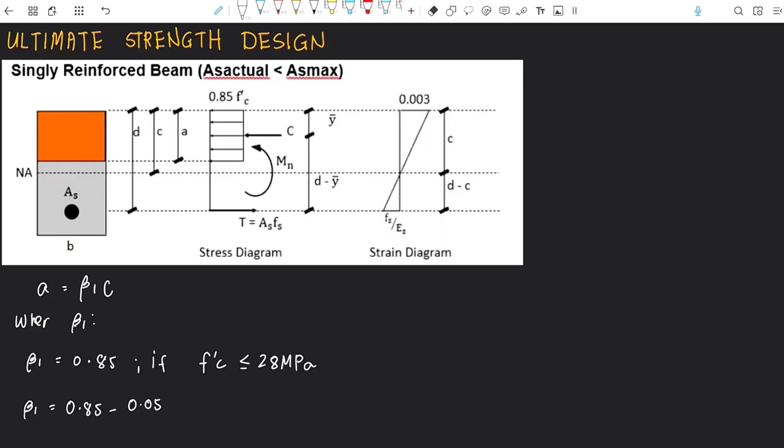Another, beta 1 is equal to 0.85 minus 0.05 over 7 times f prime C minus 28. Ito naman yung gagamitin mo if f prime C is greater than 28 megapascal. But may limitation din na huwag kang lalagpas sa 55 megapascal. Kasi once na nagsumobra ka na sa 55 megapascal, meron na ring pine-prescribe na value para kay beta 1. So beta 1 is equal to 0.65 if f prime C is greater than 55 megapascal.

So pwede mong sabihin na merong range ang value ng beta 1. Beta 1 is less than or equal 0.85 but greater than or equal to 0.65. So pwede nating sabihin upper limit si 0.85 then lower limit is 0.65.

Next, tignan natin ang strain diagram. Sabi ng code, for the concrete, the allowable maximum strain is 0.003. So ito yung epsilon C, strain of concrete. And this Fs over Es is actually the strain of steel. Try nating i-recall from Hooke's law: stress of the material over the strain is equal to the modulus of elasticity. So if we isolate epsilon, magiging stress over elasticity. Since ito ay strain ng steel, Fs over Es, meaning stress of steel over elasticity of steel.

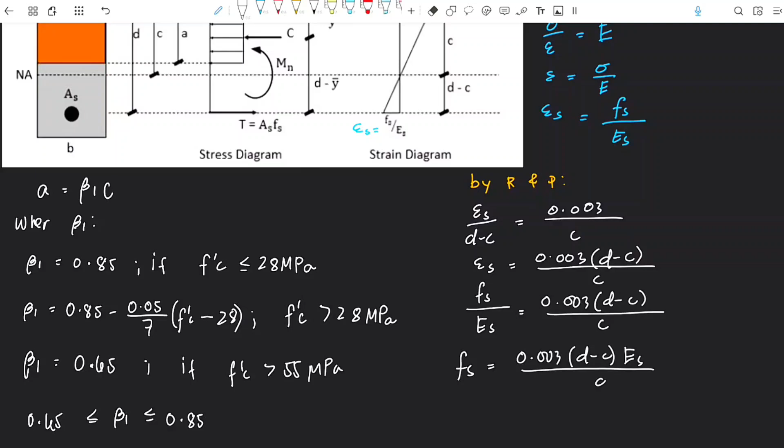Isolate, magiging epsilon S is equal to 0.003 times D minus C divided by C. Expand natin ang epsilon S na maging Fs over Es. So Fs over Es is equal to 0.003 times D minus C divided by C. So, Fs is equal to 0.003 times D minus C times Es over C. Try natin gamitin yung approximate value ng Es or elasticity ng steel. That is 200,000 megapascal. So, magiging ganito.

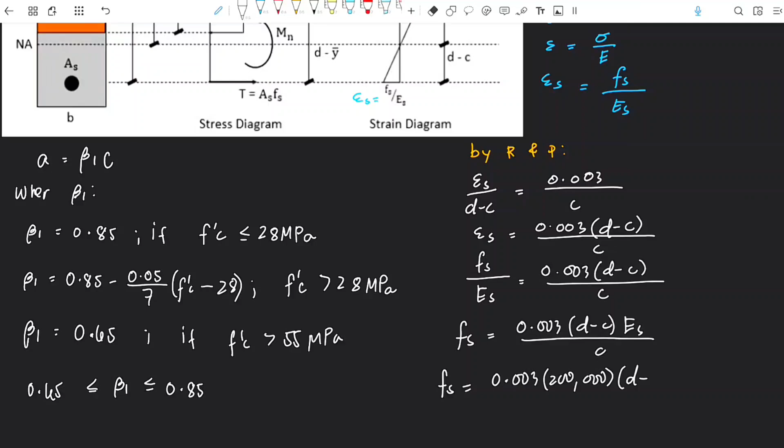0.003 times 200,000 megapascal times D minus C over C. Then, simplify the constant. Magiging ang value nito is 600 D minus C over C. Ito yung isang formula na gamit natin pagdating sa beam. Ginagamit natin ito to check kung ano yung nararamdamang stress ng steel.

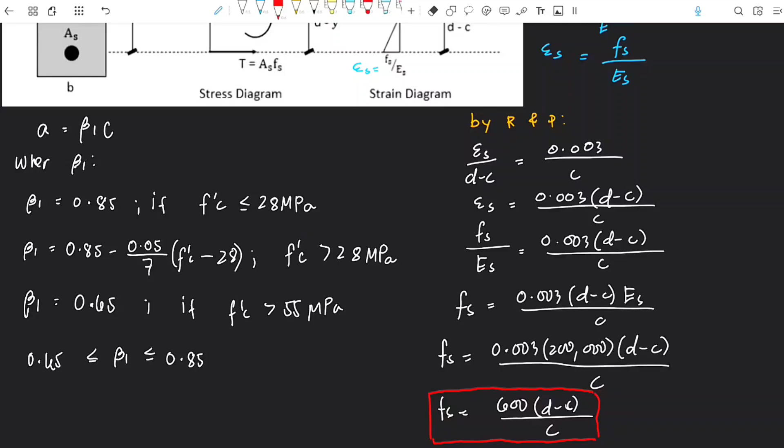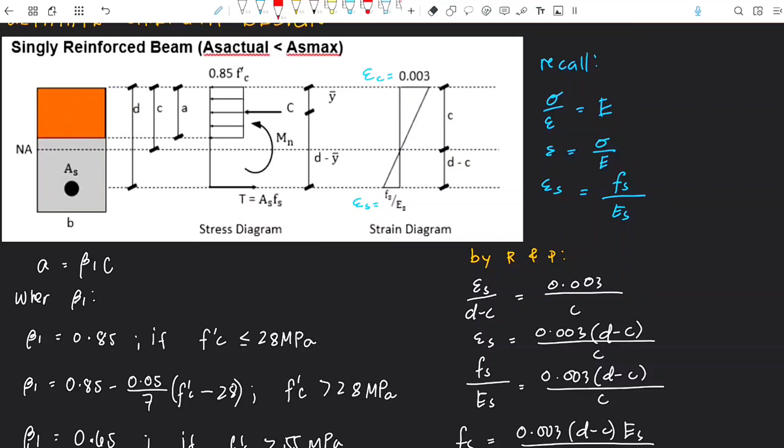600 D minus C over C. So, galing lang yan sa strain diagram. Next, focus tayo sa stress diagram. For stress diagram, sabi ng code, for the concrete, the maximum allowable stress is 0.85 F prime C.

This is already simplified. So, ginawa ng simplified ang value since hindi naman talaga rectangular ang stress distribution. Then, nung sinimplify, ang value daw nito ay 0.85 F prime C. Then, focusing on the stress, i-convert natin into force, so magiging ganito. Ang resultant force dito sa stress block is C. Then dito naman sa ilalim, ang total force sa steel is T.

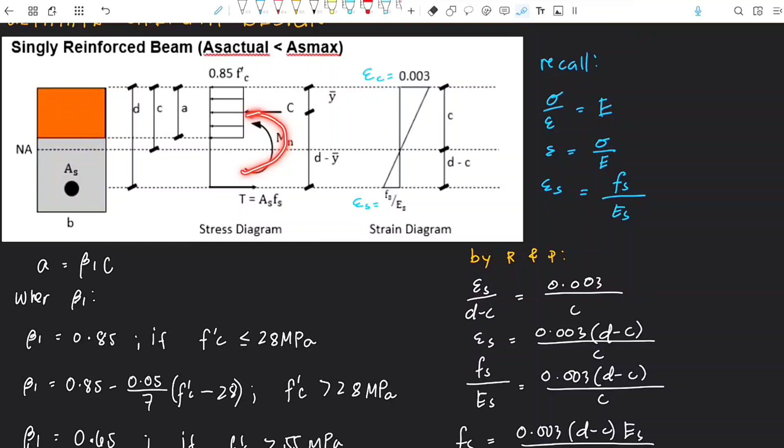Then due to this equal force, kasi dapat magkapareho yung C tapos T, magkakaroon ngayon ng nominal moment. Yun na yung capacity ng ating beam. Nominal capacity. Then if you will try to observe, if this is the location of C, and located siya Y bar from the extreme fiber, meaning to say, from C to T, the distance is D minus Y bar. So, pakitignan na lang yung geometry. Then, by observing the free body diagram, we can say,

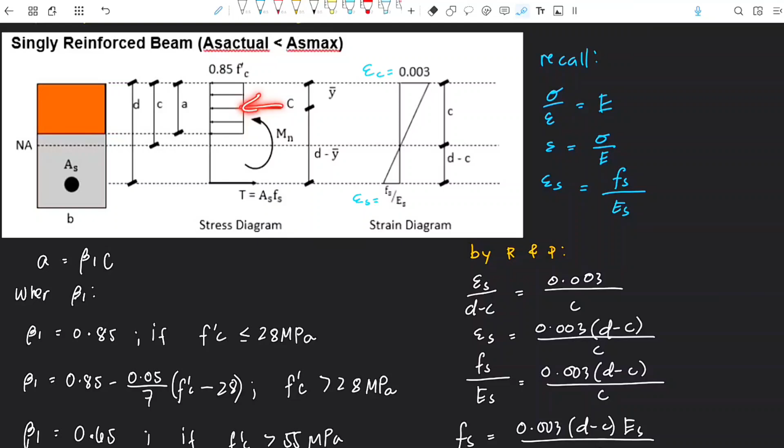summation of forces horizontal is equal to 0. Then, pwede kong sabihin yung to the left force is equal to the right force. So, pwede ko rin sabihin, C is equal to T. Ngayon, ang value ng C, obviously, is stress times area. Ang stress ay 0.85 F prime C. Ano ba yung area? Ito yung area. So, that is equal to A times B.

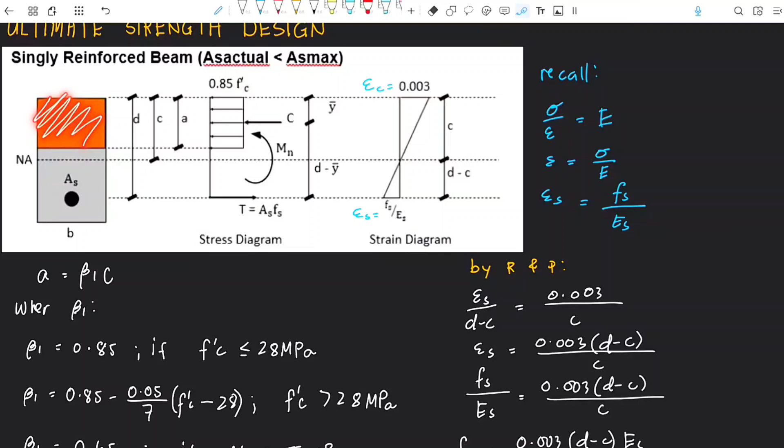This is B. So, magiging ganito. C is equal to 0.85 F prime C AB is equal to AS FS. Bakit AS FS? Kasi ang T ay equal sa area times stress or stress times area. Ngayon, magiging AB ito kasi rectangular.

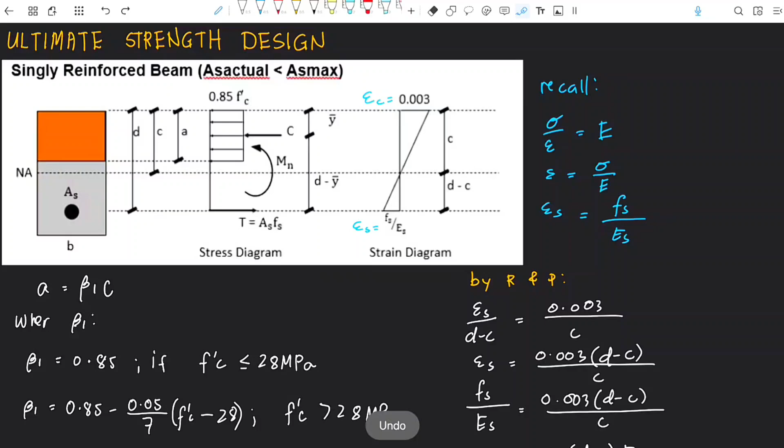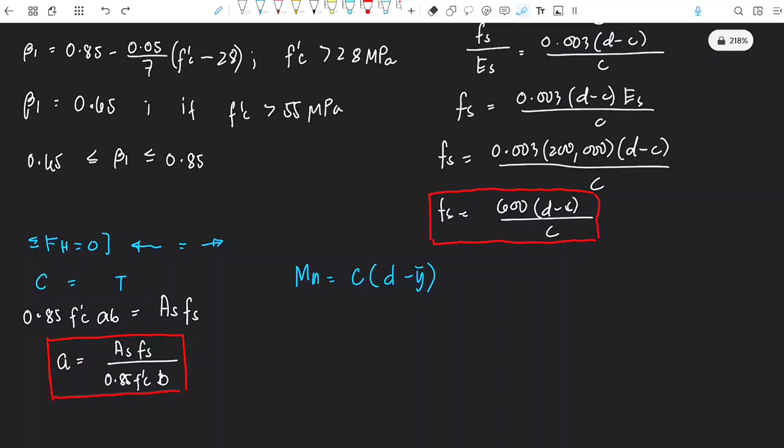Since ang stress block natin is rectangular, meaning to say, mag-a-act yung C mo sa gitna ng A. So, ang Y bar mo is A over 2. Yun yung makikita mo rin sa mga book, since rectangular ang approach kadalasan ng mga libro. Kaya magiging ganito ang mas specific na formula natin: C times D minus A over 2.

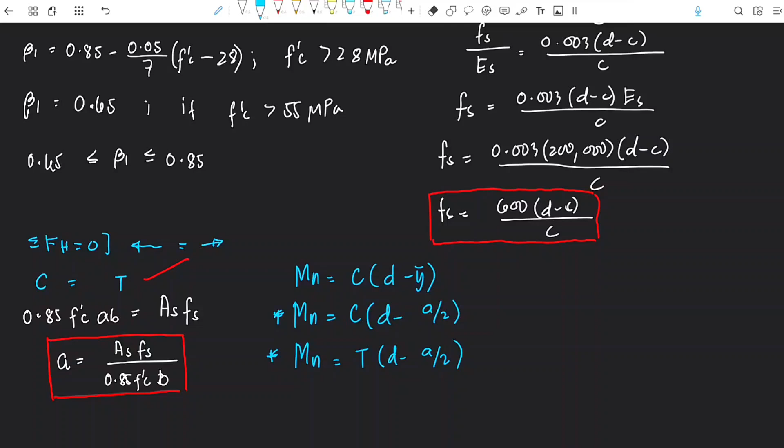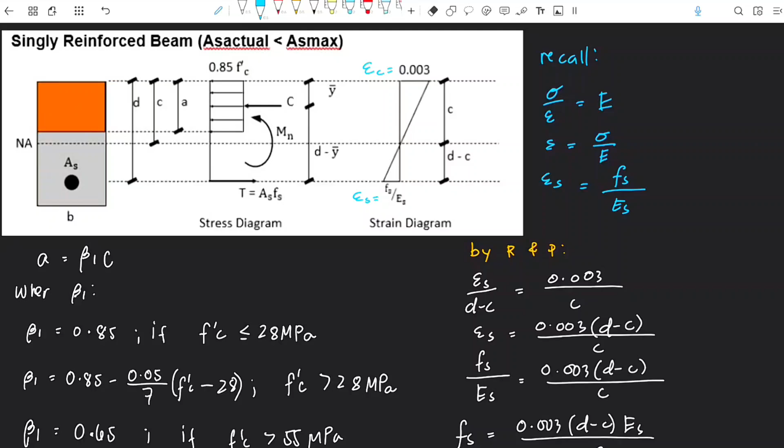Since sinabi natin na C is equal to T, pwede ko ring sabihin dito, nominal moment is also equal to T times D minus A over 2. So pwedeng ito or ito. Pili ka na lang kung saan ka mas comfortable. And syempre, kung sino yung naandyan, yun yung gagamitin nating formula. So, bali ito yung mga formulas na gagamitin natin, and also may kaunting code like beta 1 based dito sa diagram na nakita natin. So, sa next video, pag-usapan naman natin yung iba pang code galing sa NSCP 2015.